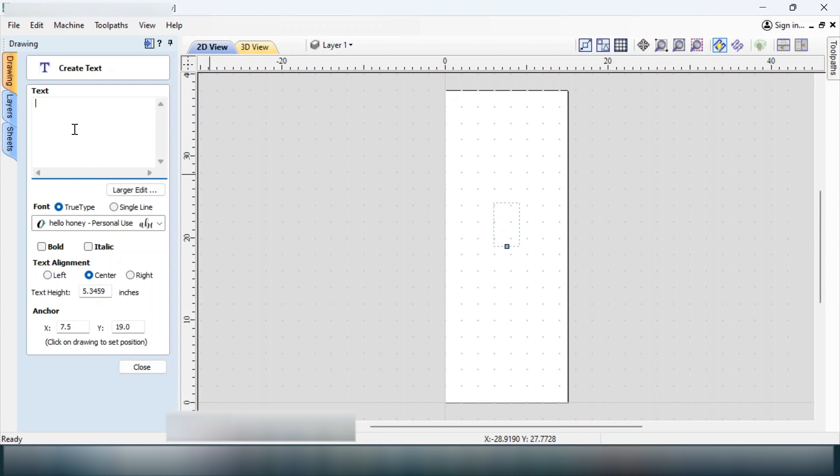So we want to create our text, using a font that my daughter picked called Hello Honey. Lowercase sweet, and dreams.

Okay, so we've got our two words that we want to use, but we need to do some work to them first. First of all, we want to rotate them. We go over here to rotate selected objects, take both of them, and rotate 90 degrees. Click apply, and there we go. Close that up.

We now want to move them. The other thing I want to do is put a guideline in, so I know where the center is. Sorry, it's supposed to be 13 inches and 35 inches long, my mistake. So 13, 6.5 is center.

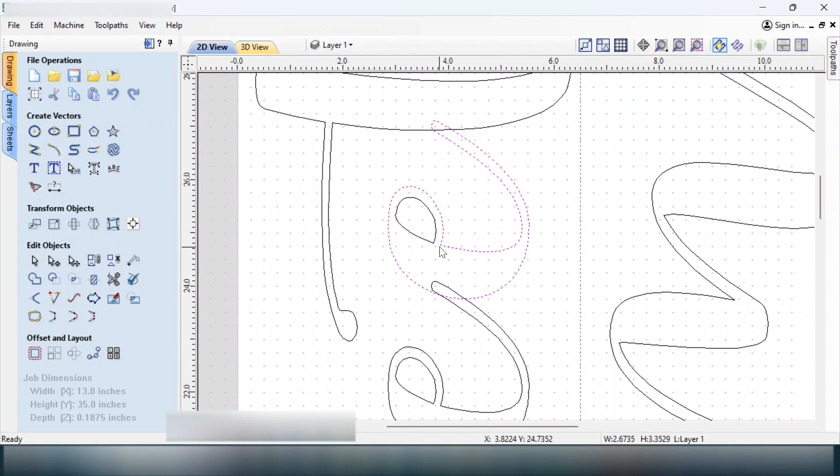Now we want to convert them to curves, and then we're going to have to weld them together. So we grab this one, and using the shift key grab that one, and weld it. Now it's joined and it got rid of that little double loop, sort of like this one here, because now it'll cut as one piece. Now we have to do the same thing over here. Weld it. Then we're going to do the same thing with this E and the tail of the previous one, and then with the T and the E. There, so that's all welded now.

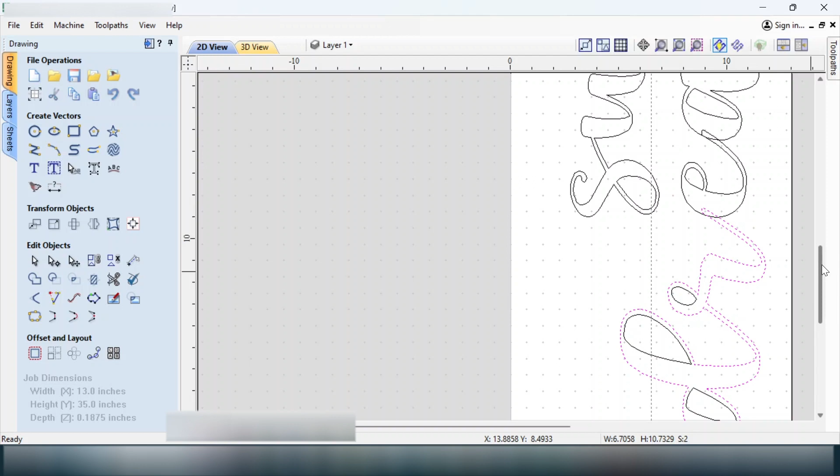We'll just do the same thing with Dream. So we have to convert it to curves. We'll select the D and the R, weld it. The E and the R, weld. The A and the E, weld. The M and the A, weld. And the S and the M, welded. So there you go.

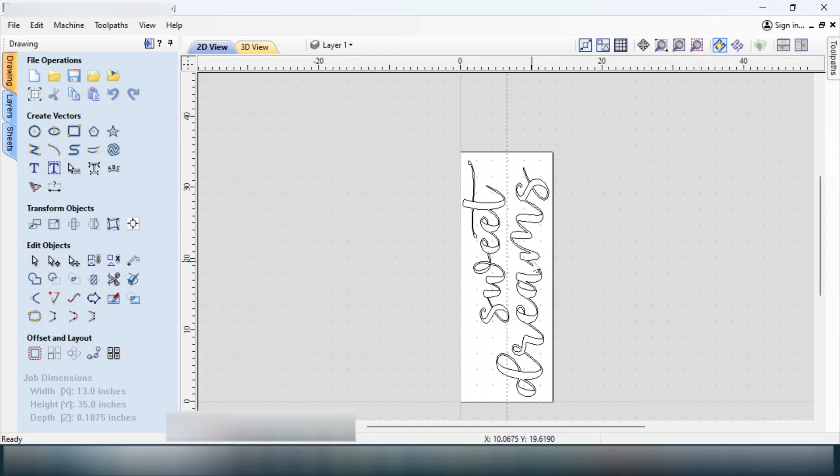Now the only thing left now is we need to do, sorry, not the only thing left, we need to do a couple other things. We're going to create tool paths for the outside and for the inside cutouts. But we also want to add in alignment holes, pinholes, so I used a 1/8 bit. I created 1/8 pinholes or locating holes, alignment holes, and then that way I could use a couple of 1/8 inch drill bits to align this as it moves through the material, or as the material moves through the CNC to cut.

So what we'll do is we'll add those in. I want to draw a guideline, swing it across. We want to go 1 inch in on each side. Okay, and then when we do our tiling, we're going to make our tiles 12 inches, so I want to know where the 12-inch mark is. And I'm going to go 1/2 inch more, so 12.5 inches.

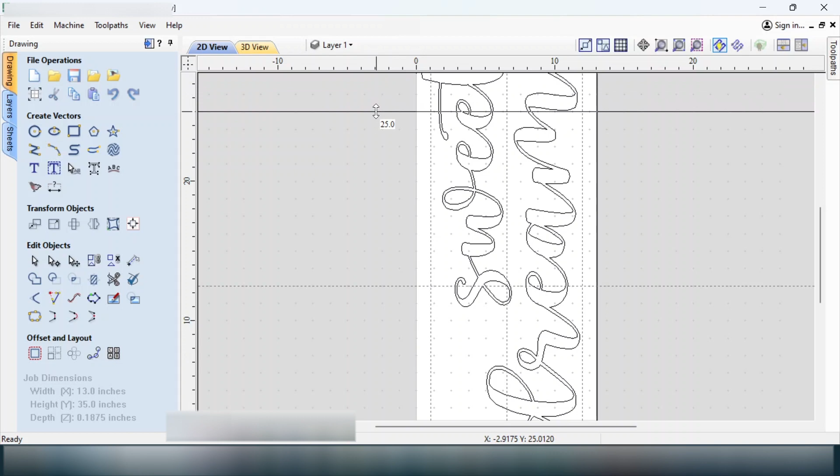Right there, that's where we're going to put our pins. 12.5, and then we want to go 24.5. And that should be enough, so we'll have 3 tiles.

Sorry, I got to do it half inch here as well. Okay, so we're going to draw a circle. We want it 1/8, so we want it 1 there, 1 there, 1 there, 1 there, 1 there, and 1 there. So it gives us 6.

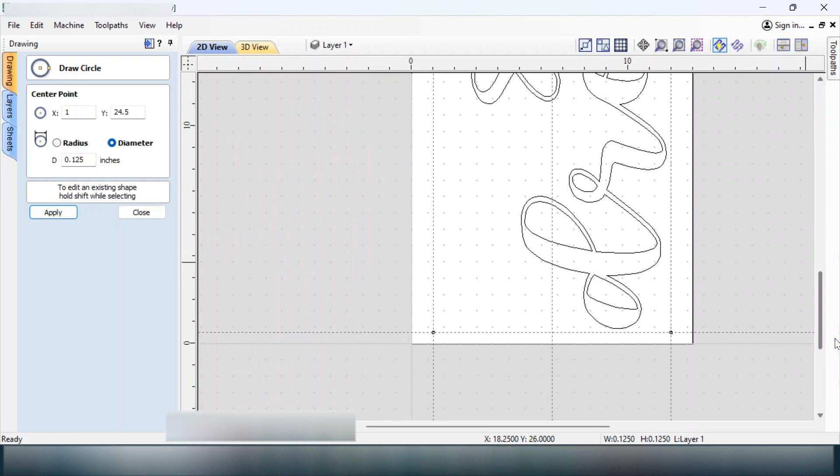Okay, and we close that. Now we can make our tool paths up. So first thing we want to do is select the tile tool paths. We're going to tile them. It tells us a warning that it's too large.

So we want our height, we're going to go in the Y direction. So we want it to be 12 inches, and we want an overlap of 1 inch. And then update the tiles.

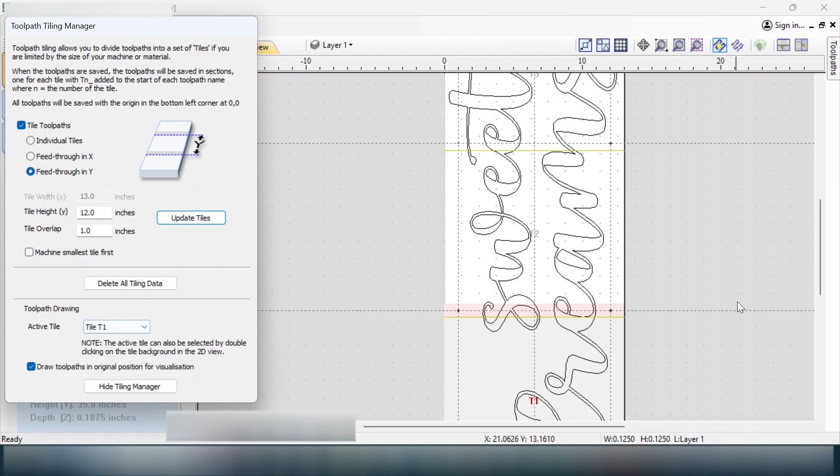So as you see, we're looking at tile T1 right now, which is highlighted in this color. And it shows it goes from the very front right past our 12.5. So our tile is going to be 12 inches where this orange line is, but we said we do an overlap of 1 inch. So this will allow us to drill the hole so that when we move the board forward, that will be our alignment hole to repin it to do the second tile.

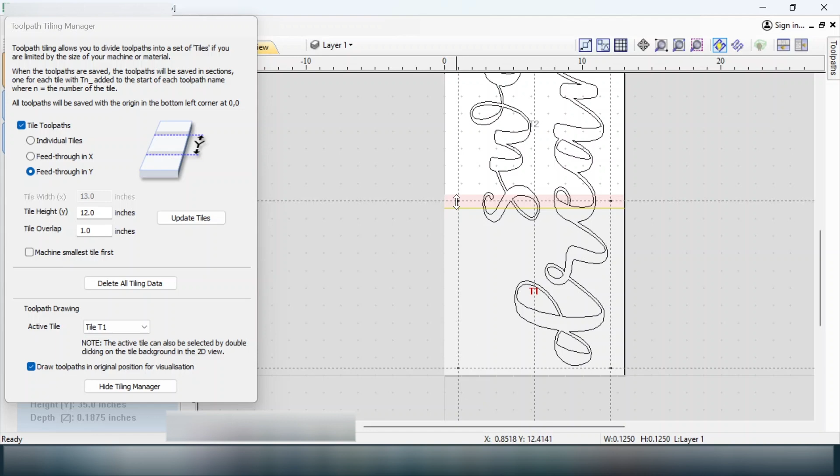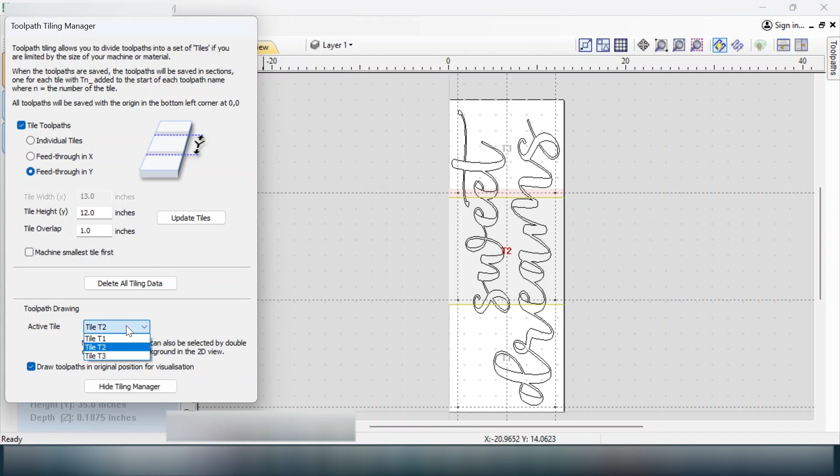And then the same thing over here when I pick tile number 2. There, tile number 2 shows the same thing. So we just leave this up. Doesn't matter which tile you're on, I don't think, so we'll just say we're on tile 1.

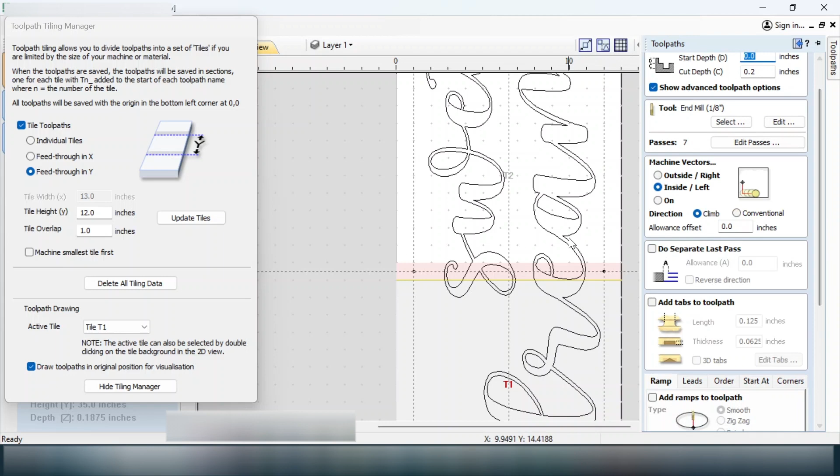So now we're going to do our toolpaths. The first thing we want to do is, and I'm just going to use a pocket here. We want to pocket out the alignment area. So using the mouse and holding the shift key, I'm just selecting each one. So now we have all 6 of them.

We got our 1/8 end mill picked. We're going to go to 0.2 of an inch. Actually, not on this, we're going to be going deeper. So we want to go 0.4 because we want to go right into the board below the spoil board, because that's where our holes will be pinned with. We don't need tabs, and we're going to call this our first one, alignment holes. And we'll calculate.

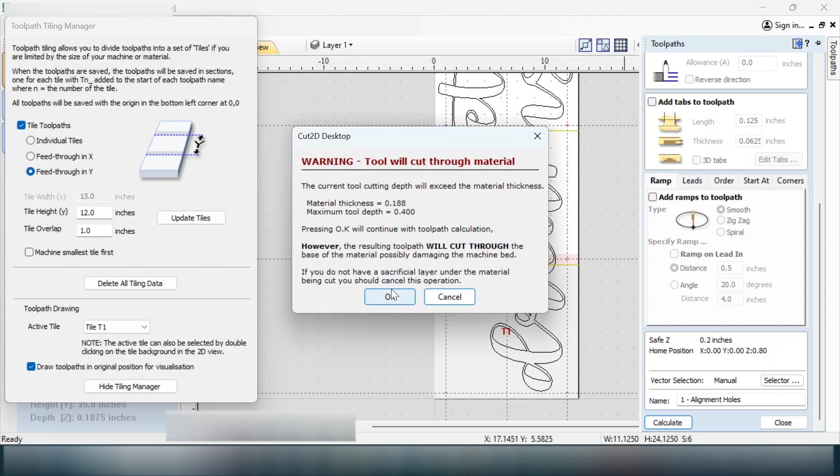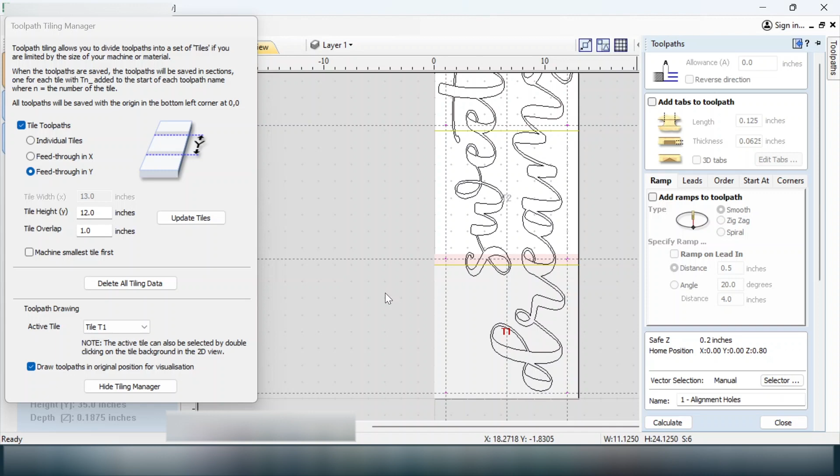There we go. So now it shows, because we only have the first tile selected, it only shows the first 4 holes. But when we run the preview, it shows all 6 holes. So that one's good. Okay, so we can close that, and we want to go back to our 2D view.

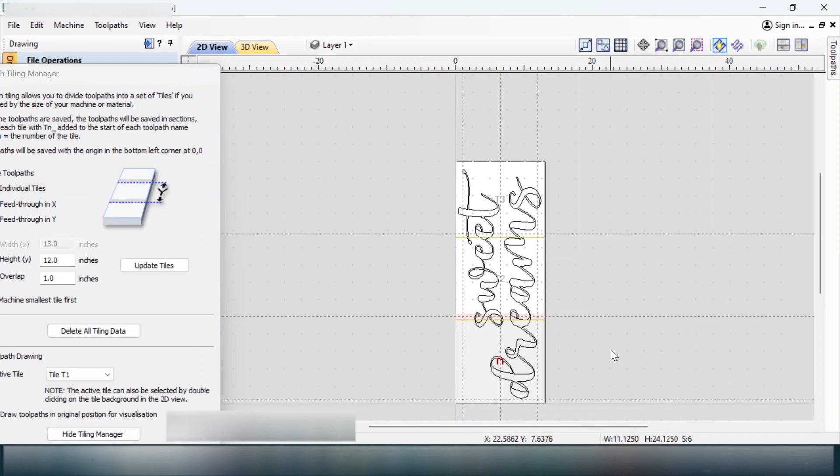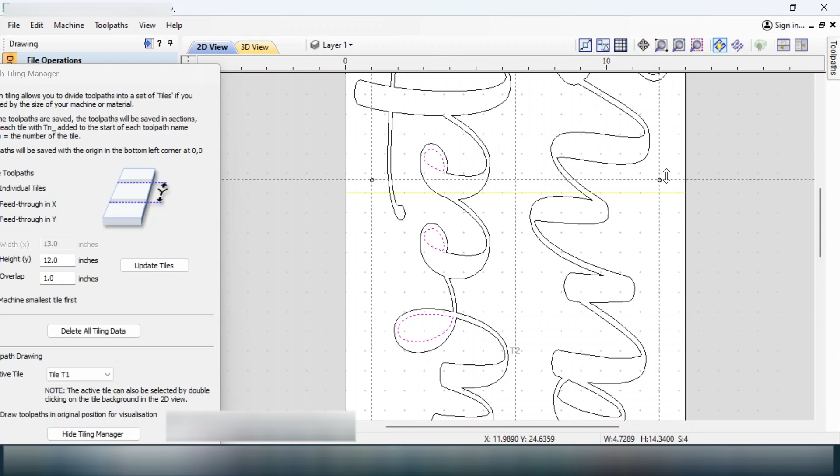And we're going to pick the insides first because we want to cut the outside last. So we're going to cut the insides. Holding the shift key, I'm just selecting each one on the inside, the cutouts, I guess you can call them.

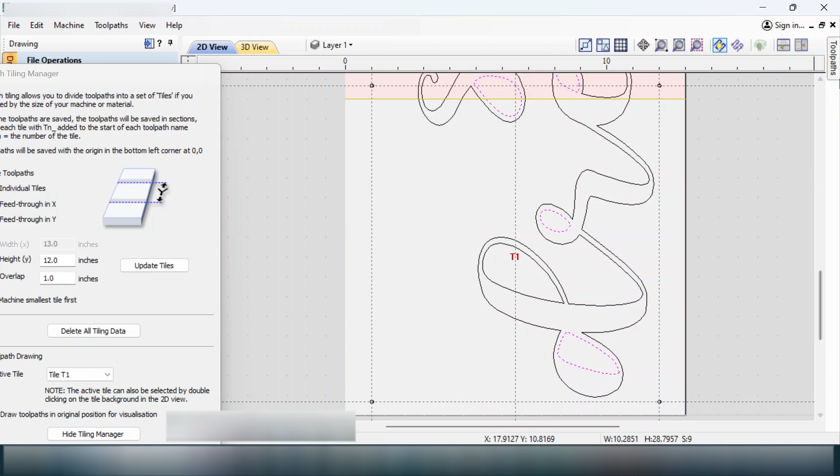Okay, so toolpath. So we're going to do the same thing. This time we're not going to go on the line, we're going to go inside the line because we want to cut this material out. So we're going to use our 1/8 end mill. We're only going down to 0.2 this time.

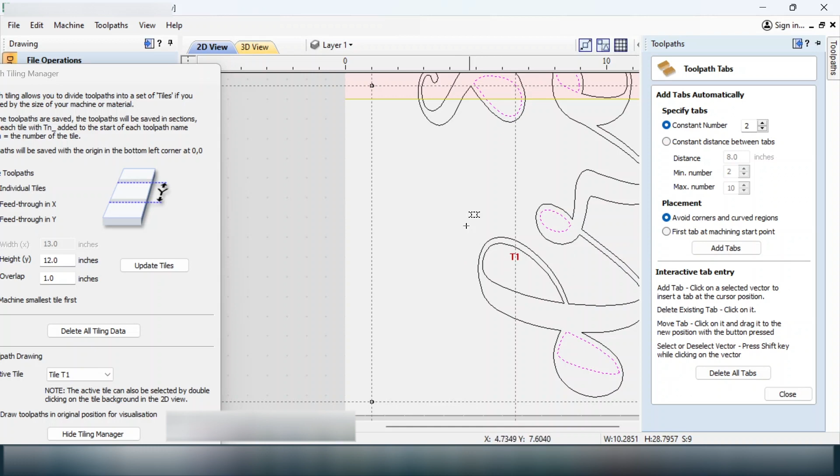We do want to add tabs, so I use small tabs. They're only 1/8 of an inch long and they're very thin for thickness. And we want to edit them because we do want to place them strategically so you can clean them up afterwards. In most cases, 1 is enough. It depends on your machine. I have a vacuum attached on mine, so sometimes the smaller ones will get sucked up into the vacuum, which is fine. It fits. Never had an issue yet.

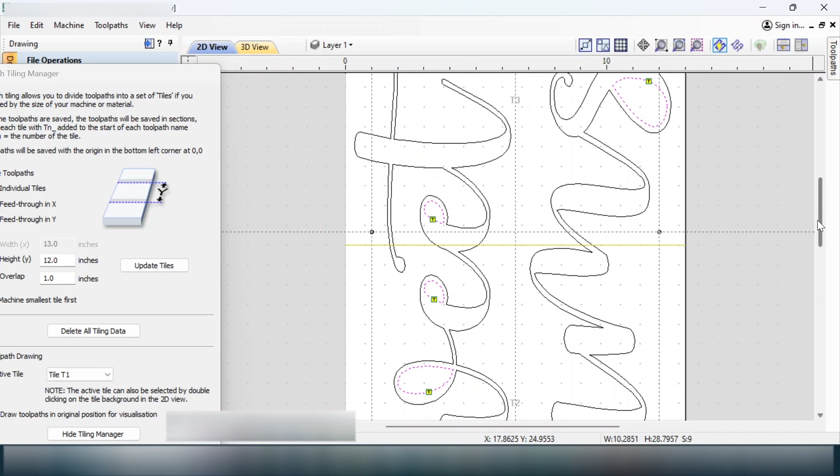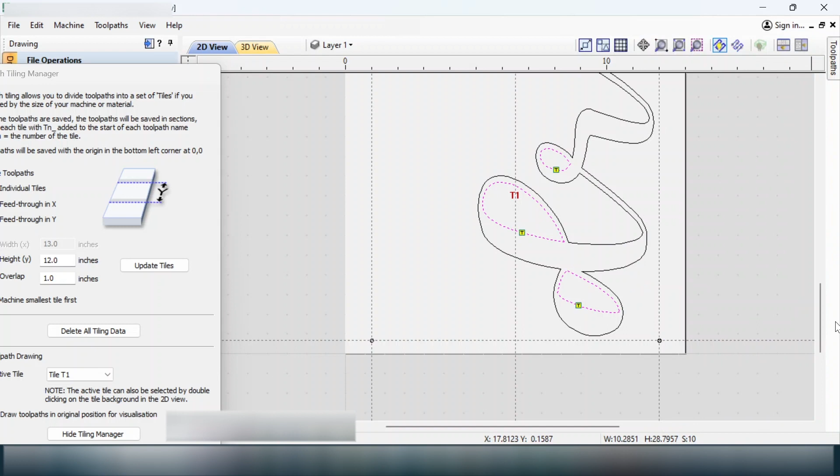Okay, so I think we're good for tabs there. Oh, forgot one, we're gonna have to go back and select that one. Okay. Edit tabs, edit tabs, add one there. Okay, so we got them all now. So now we want to close the tab, and we want to call this operation 2, center cutouts.

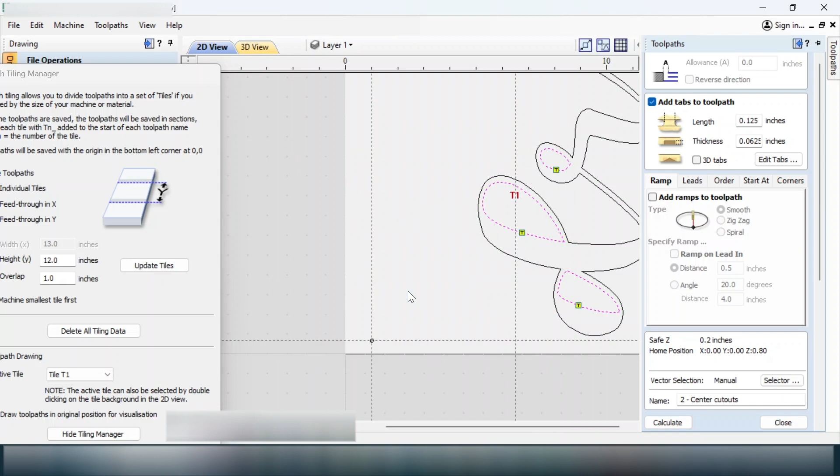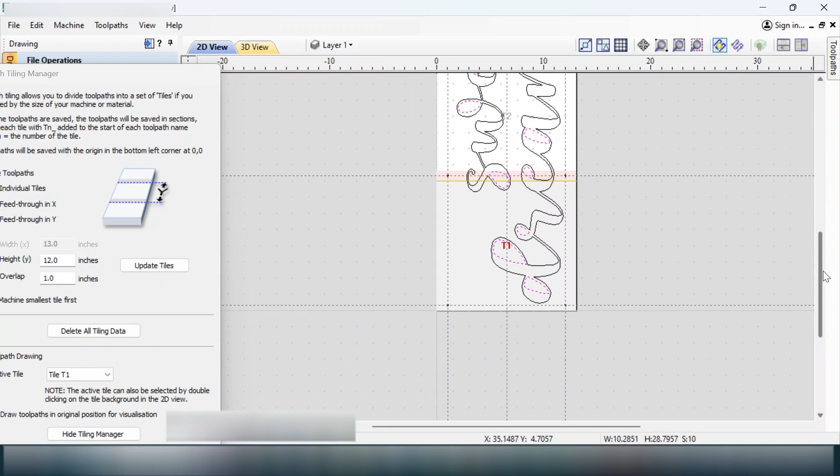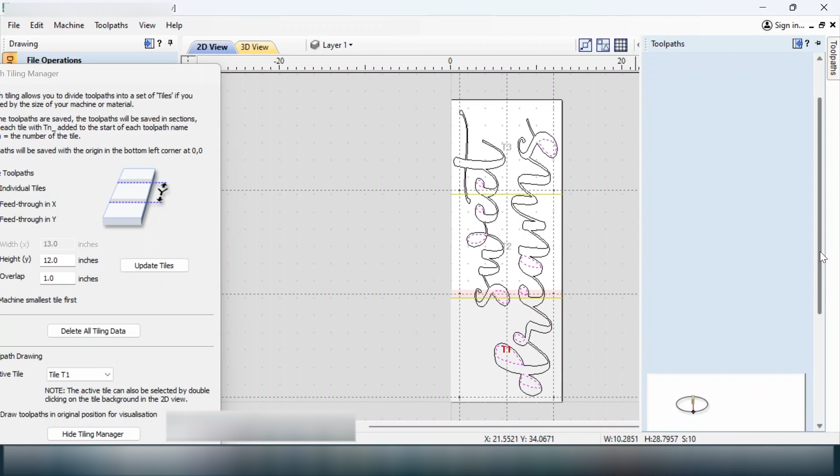Okay, so the last one we want to do is, again, we're going to do a profile, and this time we're going to do the outside, and we're going to leave the tooling all the same, the depth the same. We're going to select what we want, which you just click on the one word and it'll select the outside of all of it, and then holding shift do the same for the rest.

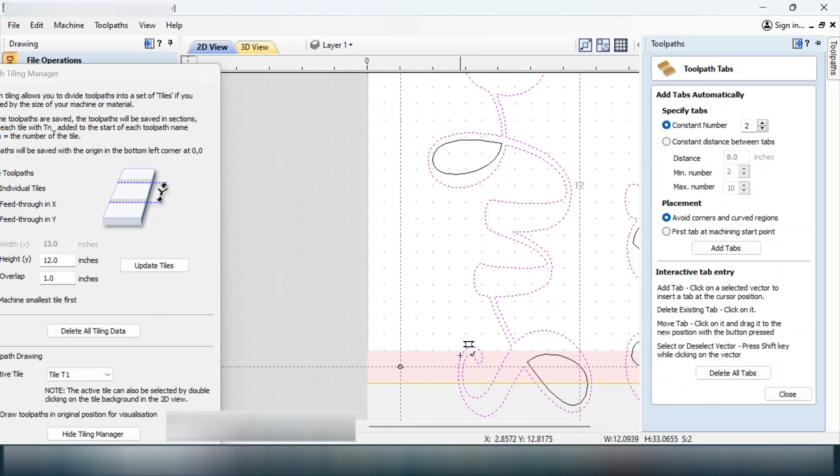We do want to add tabs, and we want to edit them because, again, we want to strategically put them. So some of this stuff is thin, but you want access to it, and you don't want it to snap. So based on experience of doing this already, I'm just going to put them where I think they need to be to hold down while it's cutting. And they're in a position that they're relatively easy to clean off with a piece of sandpaper.

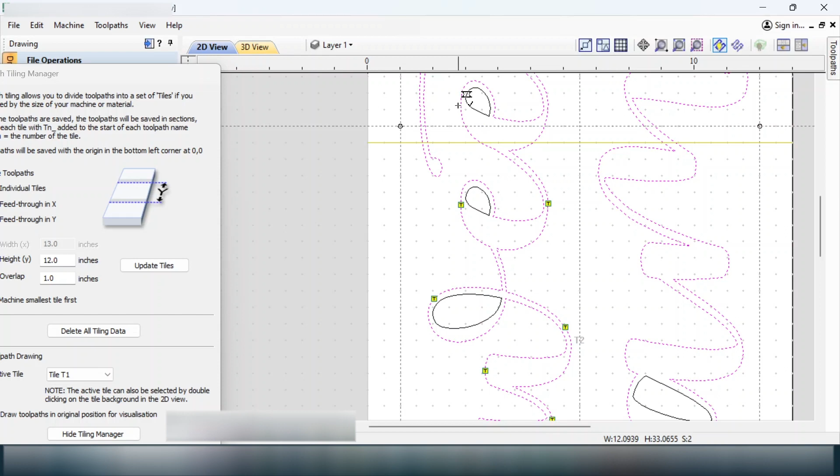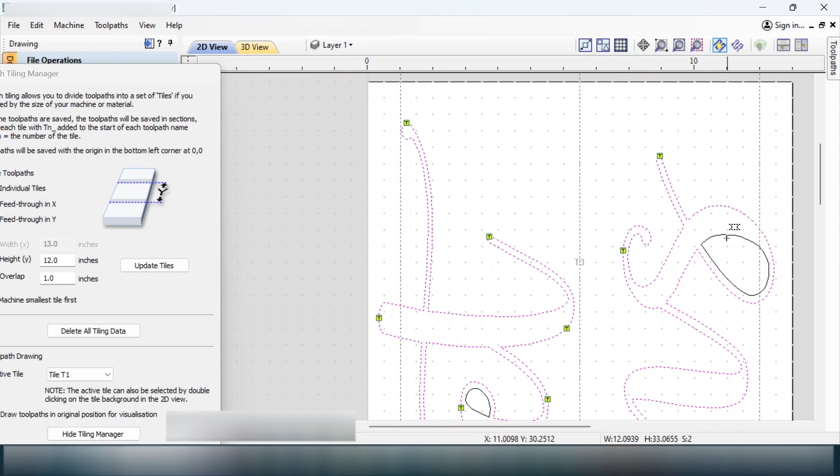We want one way out here on the T, and one on the tail. Again, you just don't want to take the chance of getting it damaged. So now we do the same thing on the dreams. Oops, too far. We'll put one there just to be safe.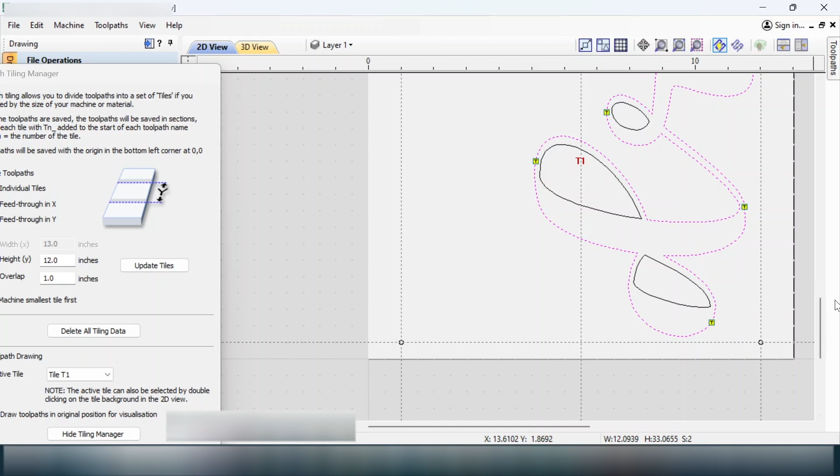Okay, so now we can close the tabs. The only thing left, we would just give it a name now. And it's operation 3, and it's the outside cutouts.

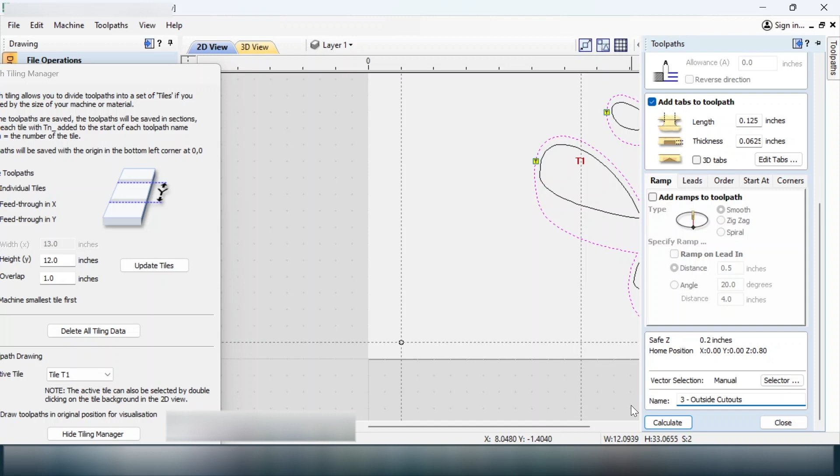Calculate. Oh yeah, a warning. Again, we know we're cutting through. Okay, and again, we've got tile 1 selected, so it's just showing the cut line for tile 1, but when we do the preview, it'll show for all of them.

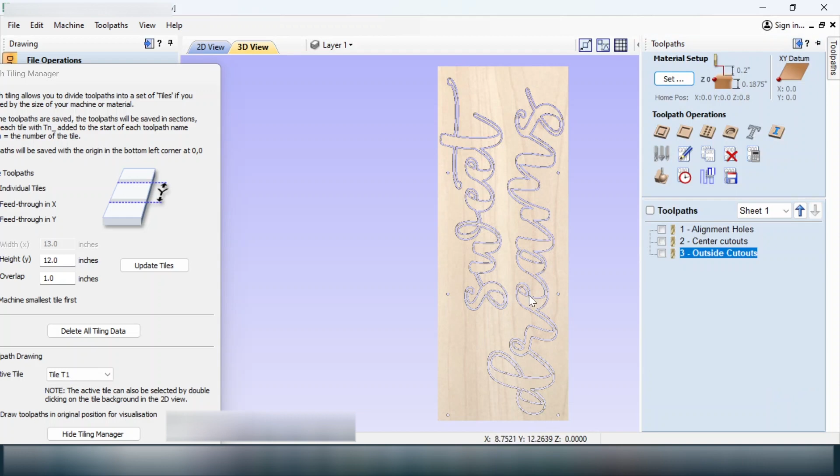There, so we close this, and we can turn this around a bit to see it, and that's what it's going to look like. So again, as I said, these holes are your tiling holes, and you'll need them in order to move the wood through the CNC machine.

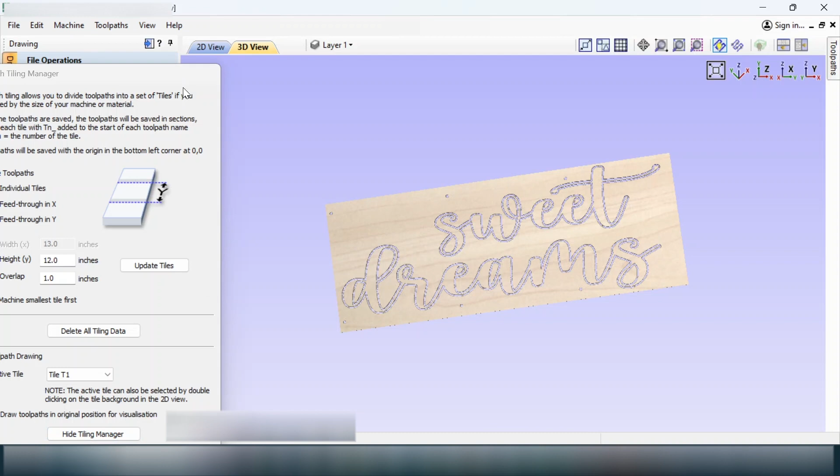So the last thing we want to do is export all of our tool paths. Save the tool path. And we're going to have a new folder. Click Save in there. And we want to do the center cutout the same way.

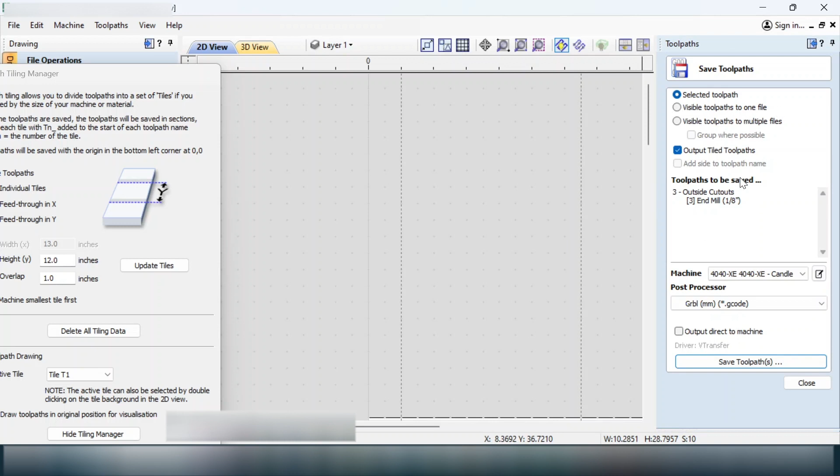And then last, the outside. Now as you see, this is the folder that I saved them to, and there's 9 files in here. Basically it's showing T1 the alignment holes, T1 the center cutouts, and T1 the outside cutouts.

So basically we run all 3 of these programs. I've got them set up so that they go individually. Seeing how you're using the same bit, you could have probably done it all together, but this was my first time tiling, and I just wanted to take my time.

So again, for tile 1, we have these 3 that will run. Then we'll move the head out of the way. We'll pull the wood forward, unclamp it, move it forward, and then we'll use the alignment holes that were created in the first one, the second set of them, to pin it. And once it's pinned, we'll lock it down with the clamps.

Then we'll run the next 3: alignment holes T2_1, center cutouts, outside cutouts. And then again, last thing, we'll unlock the wood from the base, slide it forward, pin it using the alignment holes that were created, and then we'll run the last 3.

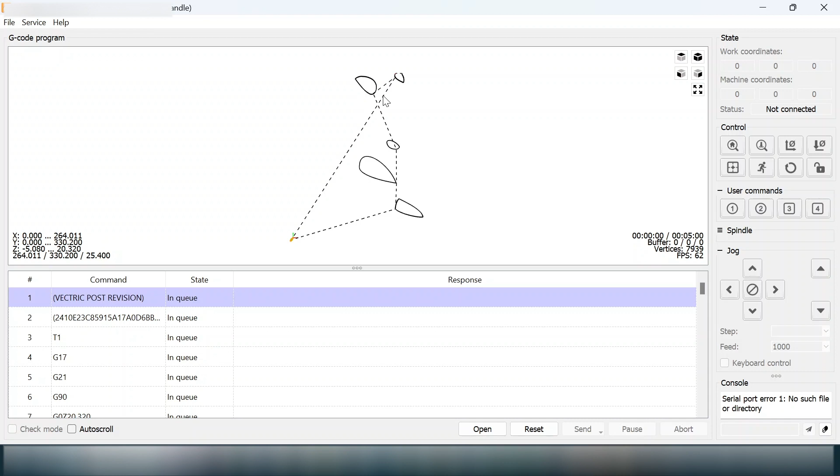And same thing for the cutouts. Okay, so that's it.

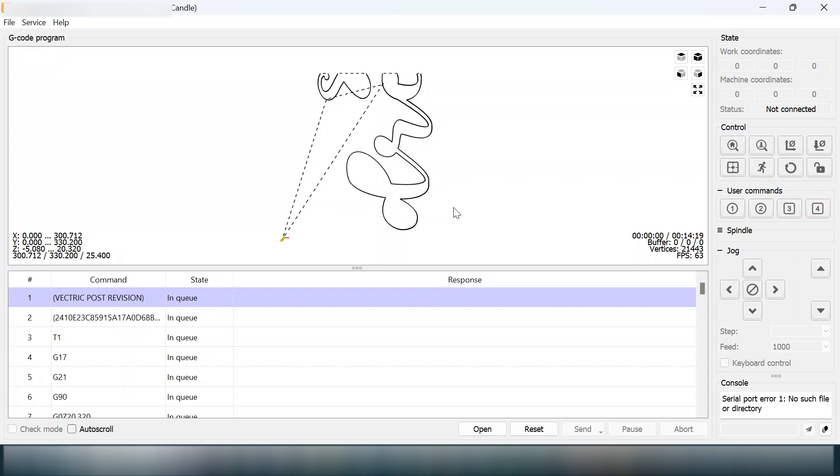Next thing, I'm just going to show you on the machine. I'm not going to go through all the steps. I've just captured some of the video of what I did, and unfortunately I didn't show you what you're probably interested in, which is the pinning part. But if you want to see that, I can make a separate tutorial or video on how I did that. And let's get it cut.